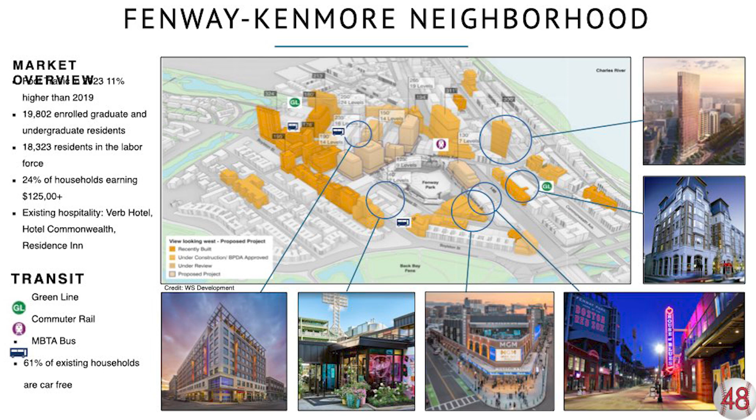New retail and mixed-use projects are really shaping the next phase of growth, and the hospitality sector continues to expand, with Citizen M contributing to the area's accommodations. Large-scale projects in the pipeline will add inventory, requiring new developments to differentiate through strategic partnerships, tenant mix, or design.

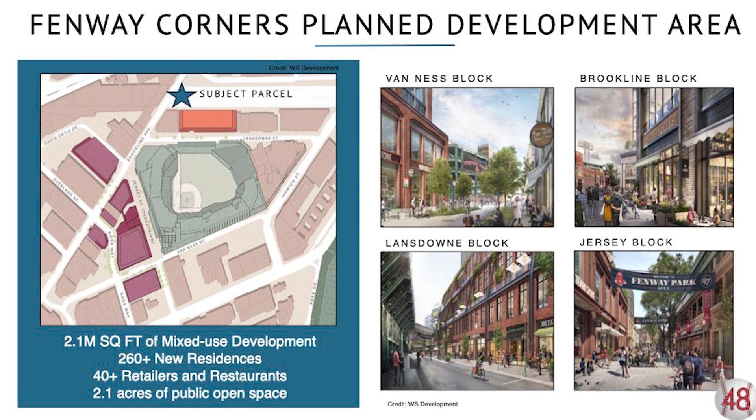Our proposal for the Gateway to Fenway will connect visitors who arrive via the Green Line at Kenmore Station through to the Fenway Corners Planned Development Area, a 2.1 million square foot project by WS Development that will introduce complementary retail, office, and public space, strengthening the area's commercial core.

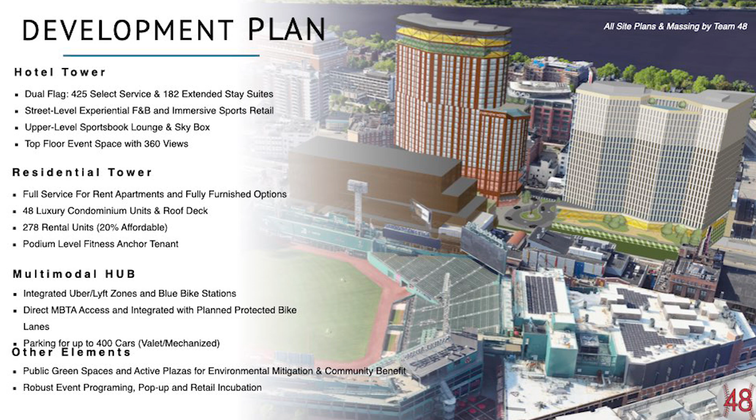This is an exceptional opportunity to create an enduring project with enduring value for the community and its investor base. We're going to bridge this gash through the urban framework with a project that infills most of the offered site with two towers, a hotel tower and a multifamily tower, working around a retail base and lots of green space. It will be an exciting place that will extend what's happening on both sides of the freeway currently.

So I want to jump straight to the site plan here and walk you through it. WS had a great idea of connecting through the Fenway Corners, rather their Lansdowne block project, connects the Green Monster, and how to bring that through. So that was put out, and we leaned into that.

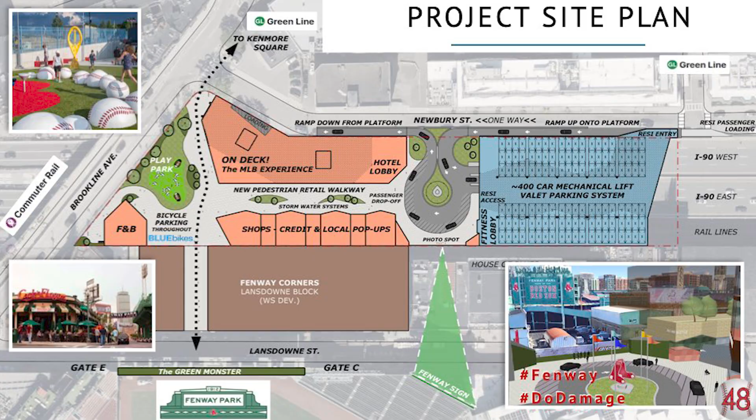We're going to double down on this idea, create a path to Kenmore Square station, and really pad it around with a play park, F&B, retail, just making it a great experience to go to the game or whatever event might be there, but also so something can stand on its own.

Building the platform up will be a huge expense, of course. But when we do that, we'll invest in not just the basic utilities, but whatever green infrastructure is possible, whether it's heat recapture, gray water systems, et cetera, doing that all at once.

Walking you through the site plan, we did not want to bring any vehicles off of Brookline. It seemed like it was a pedestrian bike zone. Bikes are going to be a big part of this story. We're going to sprinkle blue bikes through there.

What we're looking at is on Newbury, kind of sneaking in a one-way ramp up the street there. It's about 15 feet at most height you have to gain. So vehicles can go up that way and drop off either at the hotel or for shops, get to the fitness, or if you're parking in this large mechanical valet system here we're proposing.

So let me walk you through the hotel. A big part of our idea is this MLB experience that will be embedded into the hotel.

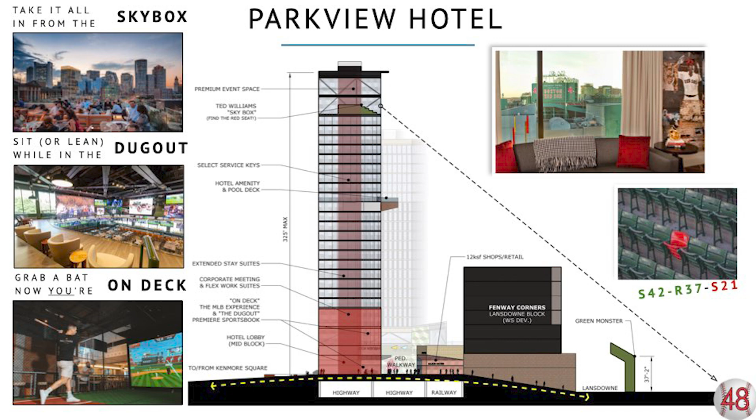It starts at the ground level with the On Deck concept, where you grab a bat and you're on deck. We'll have batting cages and pitching simulators and other active spaces behind the glass that draw you in, in addition to high-value retail along the street and in the walkways.

Going up, we'll put in a sports book that will draw people throughout the year, not just for baseball. At the top, we've got this exciting Ted Williams skybox concept with an elevated baseball field, ballpark food, and grandstands stepped at an angle so you can see the field easily, plus premium event space on top.

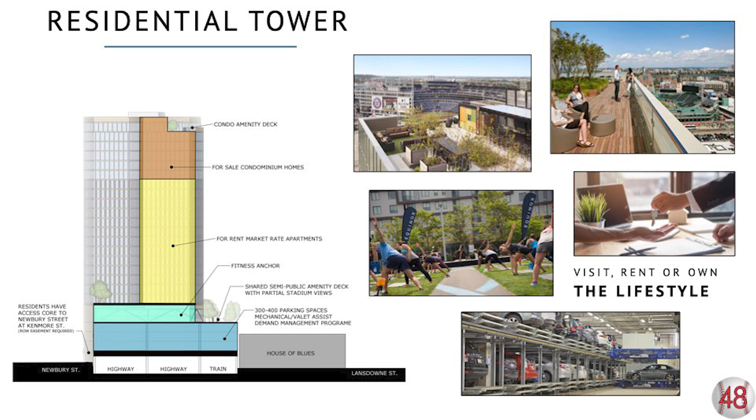Moving on to residential, there's a huge need for housing here, so we're doing our part to meet it. That stack begins with a large parking structure to soak up demand generated by the hotel, retail, and some residential. Condos at the top get deeded spaces, and apartments can rent or not, including affordable apartments — 20% is what we're allotting in this scenario. In between, we have a fitness anchor with a green deck outside facing the park, a semi-public space people can use.

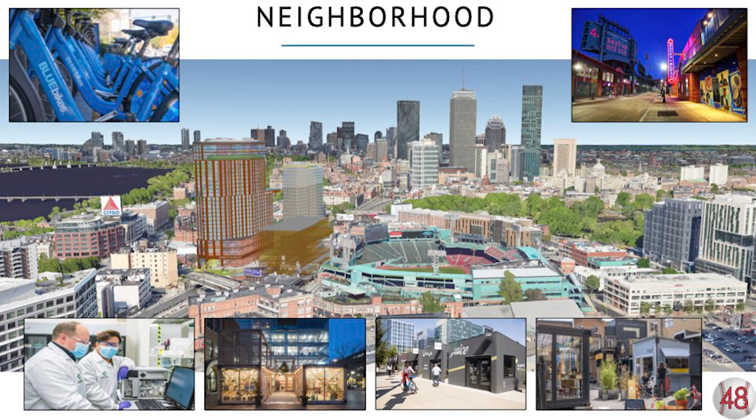We think this fits really well, like a glove, in the neighborhood. Seeing it massed out in Google Earth, it connects all these transit ideas, hits the values for local people, and extends to international travel as well.

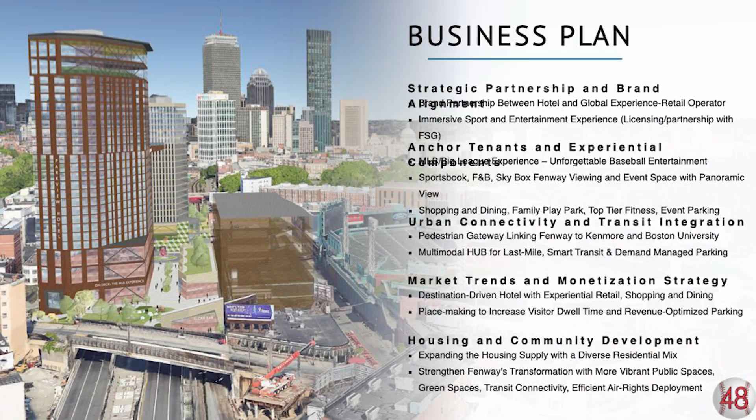So as I walk you through our business plan, we're not just focusing on the infrastructure, but on the experience. We want to bring in partnerships mainly to monetize visitor dwell time and generate revenue, and bring in high-profile operators — that's our MLB experience, which Tim touched on.

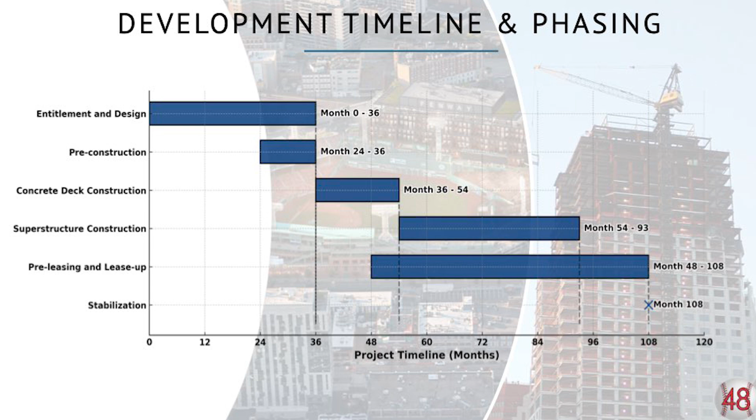The development phase will focus on entitlement design. We want to partner with the MBTA to streamline our permit process, then move into the concrete deck around month 36, following the superstructure, with pre-leasing at month 48 to support absorption by month 108.

This project will be broken up in phases. You may ask why — we know it helps with the timeline, bringing in revenue and activating the site early.

Looking at community impact, the site will include public open spaces and green infrastructure, and we'll also include new bike paths, since that was a big finding in our research — including bike paths and pedestrian walkways for the community.

As we look at the hospitality market specifically, Boston's rebounded quite strongly from the pandemic downturn. We recently saw occupancies rise to 77.2% last year, driven by an increase in international and corporate travel.

Our vision for hospitality at the Gateway to Fenway is a dual-brand strategy. We want to bring in two flags so we can cater to both leisure and business travelers, through a partnership between extended stay and select service. We love the synergy this offers the operating business and the margins it provides, along with the wide capture of potential customers and demand absorption between business and leisure travelers. We love the customer for select service and extended stay.

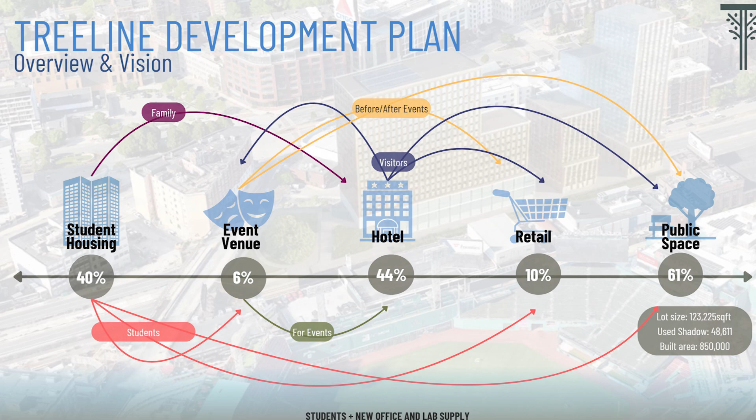It will allocate 44% to hotel, 40% to student housing, 10% to retail, 6% to event space, and over 70,000 square feet of public space. It provides dedicated student housing for students, supports the local economy with increased housing, and boosts retail and hotel activity through visitors and events.

Fenway's strong student housing demand with increased new enrollments and nearly 25,000 undergraduate beds underscores our rationale for student housing as the optimal use.

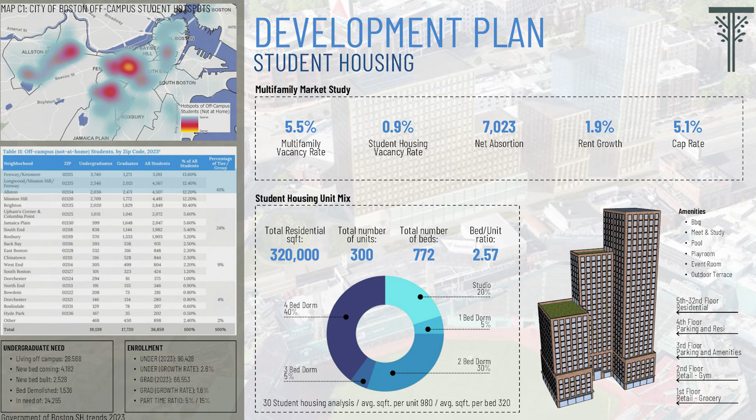The proposed 320,000 square foot development offers close to 800 new beds across a mix of studio to 4-bedroom units designed with market trends. The building will also include retail, parking, and amenities.

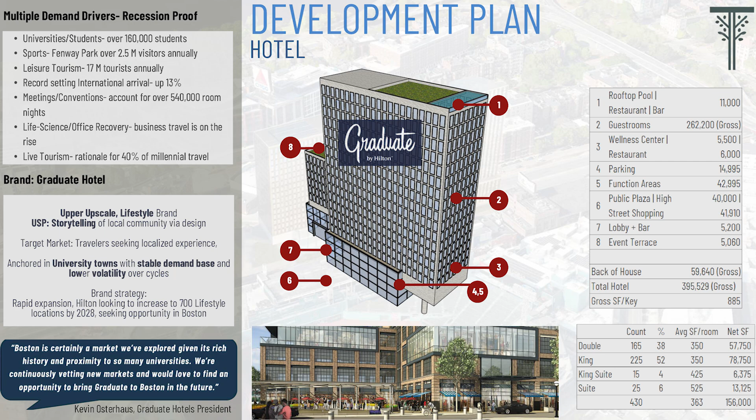We're bringing a graduate hotel to Boston, a newly acquired Hilton lifestyle brand that celebrates university-centric neighborhoods through its unique storytelling. The president of Graduate Hotels has explicitly stated that they are seeking an opportunity in Boston. Additionally, Hilton plans to aggressively expand their lifestyle portfolio, opening 700 properties by 2028, further reinforcing brand alignment.

The hotel benefits from multiple demand drivers, making it more resistant to economic fluctuations. The hotel features 430 keys, over 40,000 square feet of flexible event space, and 11,000 square feet of a rooftop pool, bar, and restaurant. Our retail and event offerings are designed to activate the site and fill clear market gaps.

Experiential retail capitalizes on Fenway's high sales per square foot and growing demand for in-person experiences. Partnering with local businesses ensures authenticity and maximizes neighborhood value. The event space addresses a shortage in mid-sized venues in Boston, serving a high-demand niche.

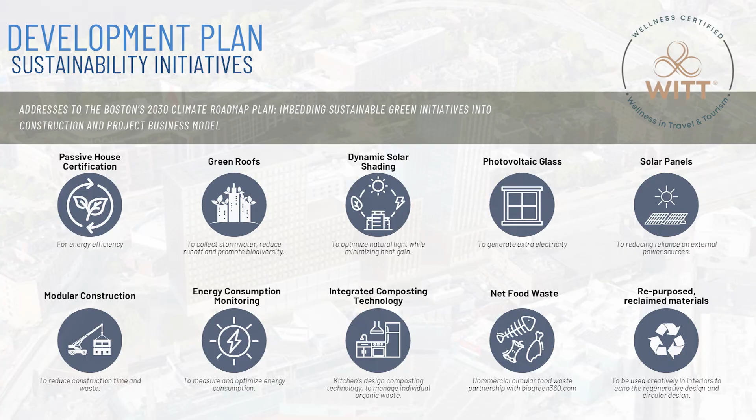Our development strategy includes sustainability initiatives, which aligns with Boston's 2030 Climate Roadmap Plan. We plan to address energy efficiency, waste reduction, and sustainable construction, and we also prioritize wellness. Therefore, we'd like to obtain a wellness in travel and tourism certification for our hotel.

Okay, now let's go to the fun part. Let's dive into the project layout.

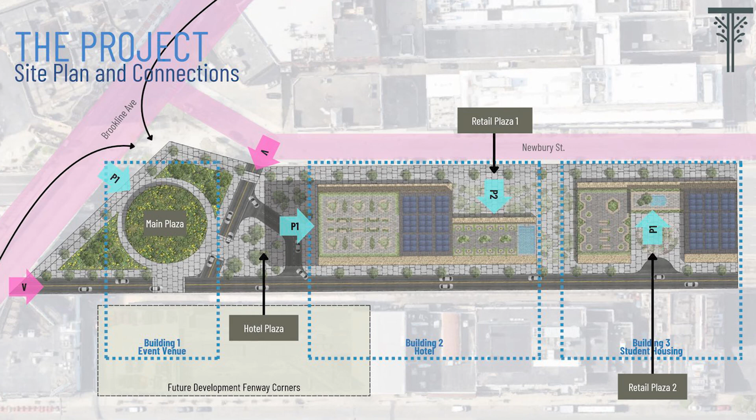Kenmore Station will be somewhere here, and Brookline Avenue will serve as the main connectors to the project, driving you to the main plaza and event space. Our second building hosts hotel and retail, both with private entrances - hotel through Hotel Plaza, retail through Retail Plaza 1.

Our third building is hosting student housing, with the main entrance through Retail Plaza 2. The main plaza is also our main connector with the future development of Fenway Corners. We aim to connect Retail Plaza 1 to Newbury Street and hopefully Retail Plaza 2 to future developments.

Vehicle access will be through Newbury Street and Brookline Avenue, guiding you to the drive-in for the hotel and parking for hotel and student housing.

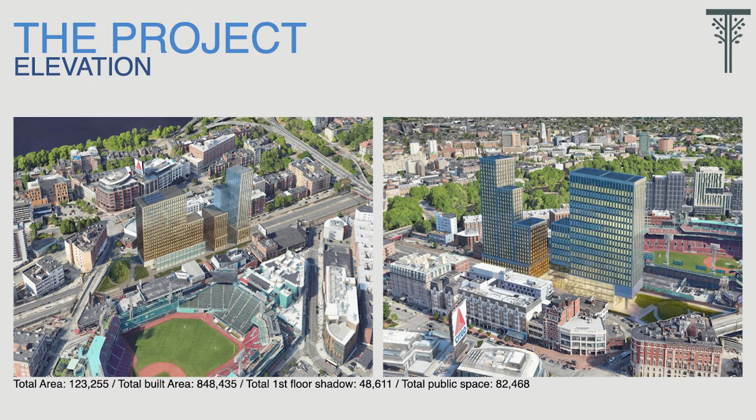Here you can see the relationship of our project with the city, but we'd like to highlight our main plaza that will be able to host views of Fenway Park while hosting memorable events below. And imagine this during the winter - how cool will it be to have a sledding hill in the middle of the city?

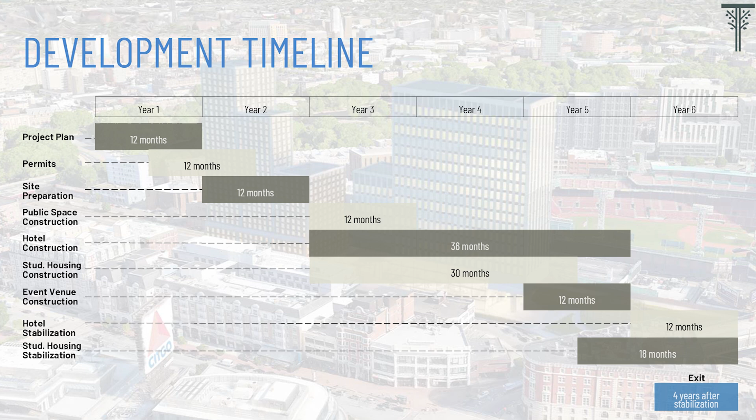For the development timeline, we plan to finish project plans and permits within 2 years and start construction of hotel and student housing simultaneously. The event venue will be built last in the construction cycle, and we plan to exit 4 years after stabilization.

We believe we're tackling Fenway's key challenges like limited public space, traffic congestion, and housing shortage - by prioritizing walkability, adding public areas, easing rental pressure through student housing, and supporting local entrepreneurs through retail. We believe that early community engagement ensures alignment with local needs.

We selected our comp set using the 5 Ps. Aside from a 300-key Stanhope Hotel expected to open in 2027, this remains a tightly held market with few entrants. The Graduate isn't just differentiated in product, it's entering post-recovery.

Existing inventory isn't meeting evolving guest expectations, and is aging. With its experiential branding, university alignment, and integration into the neighborhood, the Graduate is positioned to lead in both absorption and long-term rate performance.

The STR data tells a clear story. In 2020, occupancy fell to around 30%, but what followed wasn't just recovery - it was a return to pricing power. From 2021 to 2024, ADR rose 24% and RevPAR grew 21%. Boston's hotel market didn't just bounce back, it matured.

This resilience strengthens our underwriting and supports a confident outlook for our hotel. The STR data not only shows when guests are coming, but also how they're coming. Weekend occupancy consistently outpaces weekdays, underscoring Boston's strength in leisure travel and signaling room to grow as business and group segments rebound. With new office and lab space coming to the area, weekday demand is only expected to strengthen.

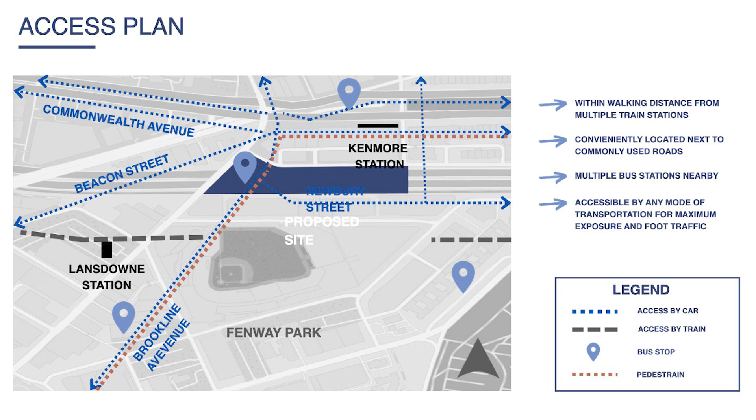So the concept: we moved from the access, where the site can be accessible through the east end, through Brookline and Newbury Street, which has both vehicular and pedestrian access from the side.

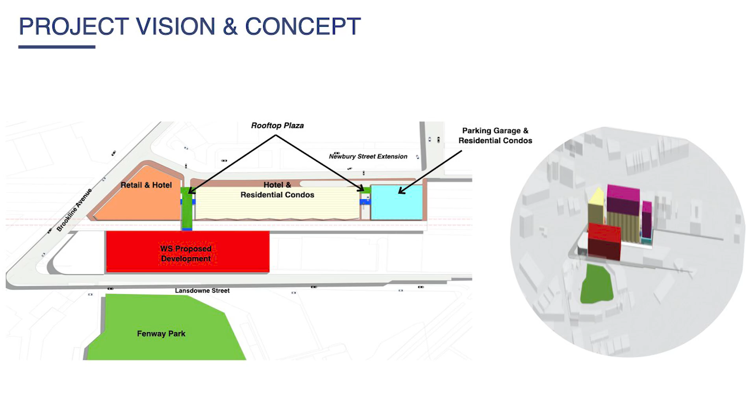Here's the site plan. We're looking at the parking garage being on the east end, with the condos, residential, and hotel right in the middle, and retail and the other hotel on the west end side. This helps bring people to the middle, and we have a sky bridge that connects these spaces together, making it seamless.

On top of the sky bridge, we have a green facade plaza at the very top, which helps with urban heat island reduction.

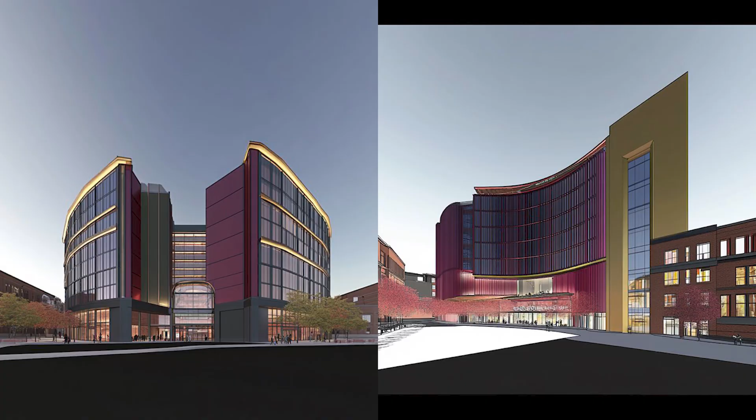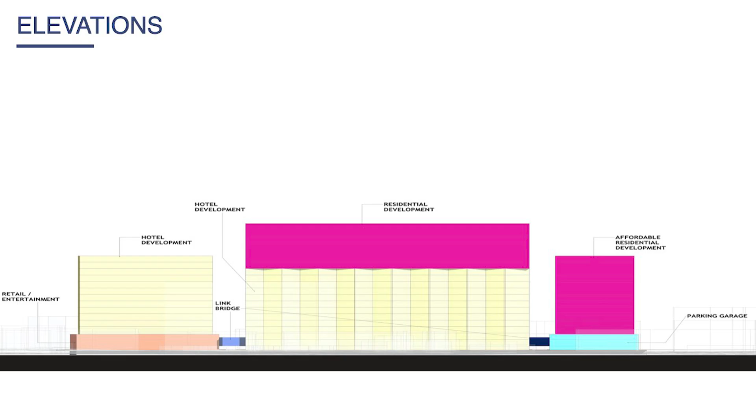This is the elevation, which actually shows how high and how the affordable layout would be, how the hotel development would be, and then the residential condos, luxury condos at the very top.

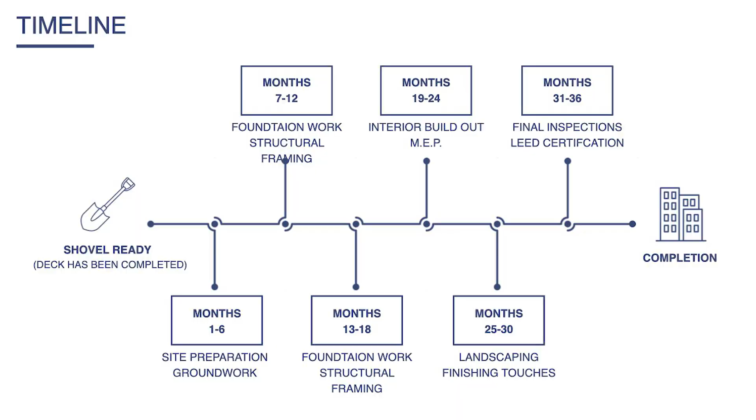The community integration actually helps the development in enhancing the Fenway neighborhood by supporting local businesses and residents, offering vibrant public amenities and gathering spaces for the environment. This also helps in bringing plazas, economic growth, job opportunity, effectiveness of the environment, sustainability into this development.

So we'll look at the investment analysis now. We begin with our competitive set, which consists of Boston's leading 5-star hotels, carefully selected based on brand positioning, location, and guest profile alignment. These properties define the benchmark for pricing, service, and guest expectations in the city's luxury hospitality market. By analyzing their performance, we gain valuable insights on how our project can remain competitive and attract high-end travelers.

Next, we look at key performance metrics: ADR, occupancy, and RevPAR from 2018 to 2025. This historic and projected data illustrates market trends, including pricing power, demand fluctuations, and recovery patterns. By understanding these numbers, we can make informed decisions about how to position our property for long-term success.